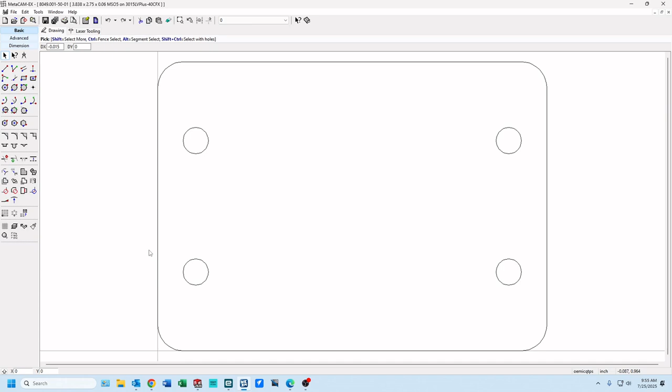And so we are still in the laser post-processor, so we need to change this. There's a quirk to this in that you go to part settings, defaults, load by name, and click on Trumpf, hit OK, load all settings.

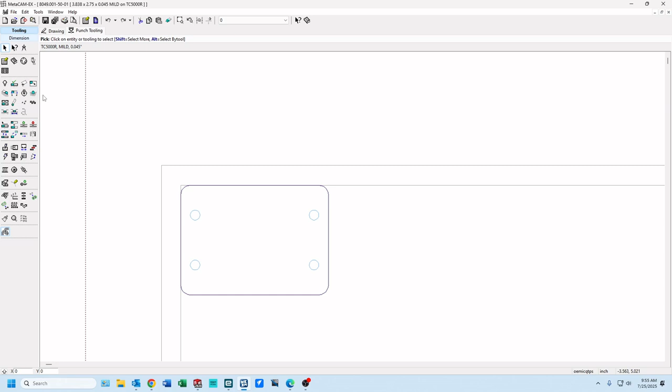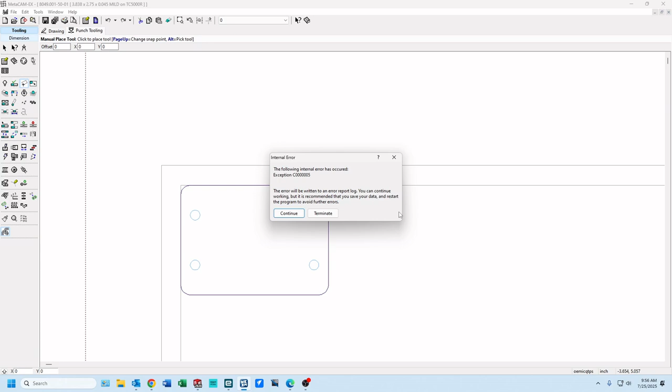When you go to tool this, it gives you an error and closes for whatever reason. As soon as I went to go select a tool, I think the reason is it still thinks this is laser, but then we have the Trumpf, so it's got conflicting data. So essentially it needs to reload. If you just hit terminate, it'll just close Metacam out.

So now when you open it, re-import that DXF file. We use the same one again, hit OK. Now it says punch tooling. You click on that, you can see the clamps of the Trumpf.

And now when we hit it, it'll actually bring up our tool library. Once you bring this in, you just need to close it out, reload it, and everything's good. It'll be fine.

So we don't need to do anything with this part. We'll do the wire joints in the tooling section of it. So we're good with this.

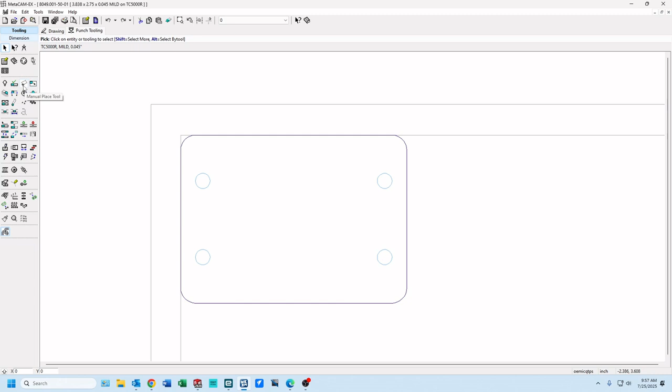So first thing you need to do, same thing, go here. You want the machine to be the TC5000R. Material's mild, thickness we'll do 060 again.

Sheet size, the Trumpf will do up to a standard without a sheet shift. It'll do a 5x10. It will actually do a longer sheet than 10 feet wide, or 10 feet long rather. We haven't done that, but it has the capability.

The Trumpf is different in the margins. Left, top, and right are all 1/2 inch, and then the bottom is 3.5 inch. The reason for that is there is a no punch zone 3.5 inches from the edge of the sheet, so the machine doesn't actually punch through one of the clamps.

So this should load up in the default, so you can just leave it. Everything else should be fine, you shouldn't have to change any of this. You can change the position of the clamps. For whatever reason, if you have a shorter sheet, a special size pre-cut sheet, you can actually go in here and change the position of the clamps. But otherwise, just hit done.

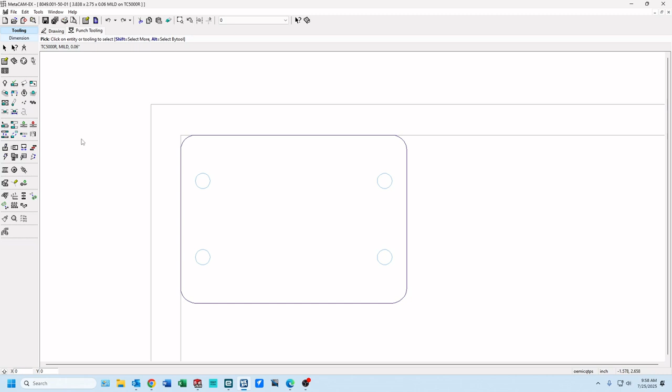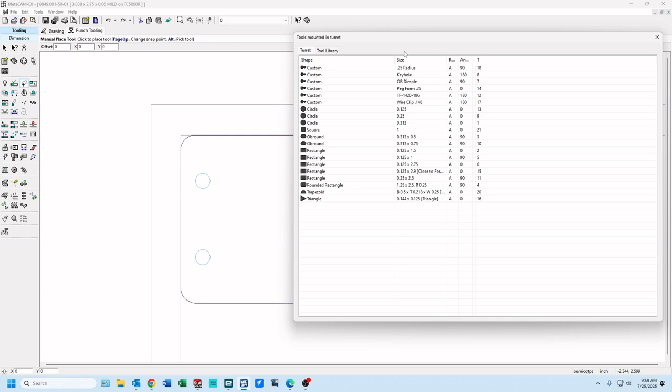And so now we are ready to tool this part. So manually place tool icon, it will bring up our tool library. This is what the software thinks is in our turret, these are the mostly used punches. If you click on the tool library tab, these are all the tools that we have entered in so far. So the first one we're going to do is the radius.

So 1/4 inch radius. This part has 1/4 inch radiuses on all 4 corners. So right now the tool won't do anything. If I place this tool, it's not going to turn, it's not going to do anything. So if I right click...

And now you can see I can pick a corner or a point of origin for this tool. So how do I want to do this? For this radius, I'm going to left click the midpoint of this radius section. And so now when I go to a radius on the part, it will actually automatically turn the tool, I don't have to do anything to it.

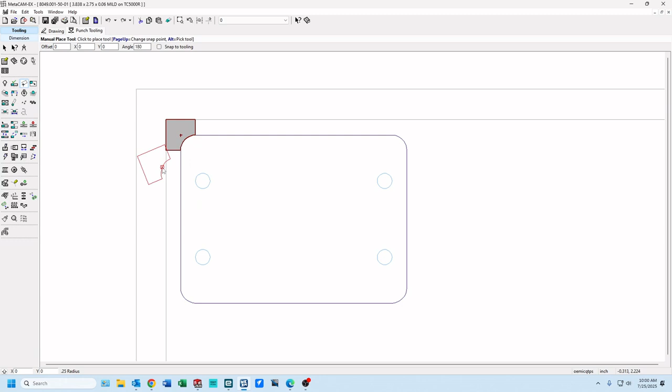So we start here, and you can see when it lines up to the midpoint, you can left click this and it will place the tool. So here, left place that, place that, place that. So now we have all of these in line.

So next step, let's do the circles. I think these are 1/4 inch circles. So again, in our turret, we have a 1/4 inch circle. We'll just select that, and we'll just go to the center point, center point, center point, center point. And now we have tooled up all the circles.

So now we need to do this outer edge. There's a couple different tools that you can use, but the first thing we need to do is create a wire joint—everything on the Trumpf has to have a wire joint. That's so while this sheet is actually moving around on the machine, these parts don't get cut out completely and go flying everywhere, get up under the head, and cause a bunch of problems.

So we'll manually place a tool, and on this one we use a trapezoid. We'll right click, and when we do this it shows the center point. You can go to the center point and it will just place it anywhere on this line. If you right click and actually get the center and the end, it will snap to the closest edge.

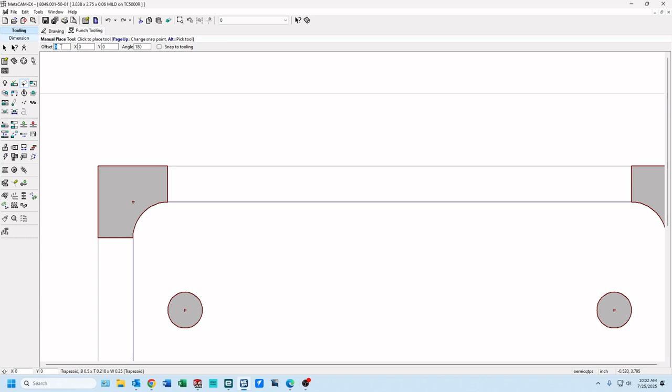Since this is 060, hit tab, hit tab, and it will come up to these boxes where you want to put in an offset. This will offset the tool away from that edge. I'm just going to put in 0.015 for 16 gauge and hit tab. Now it's hard to see, but when you scroll in, you can see it actually leaves a small gap between this tool, or this edge rather, this point, the start of this radius, and where the tool starts.

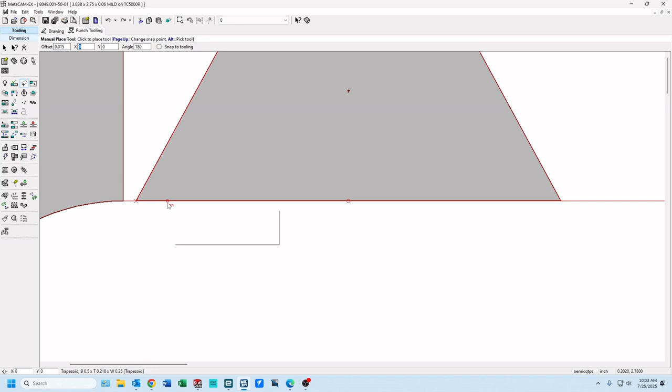So when we left click that, it will place that. If you visualize this sheet, this part is being left, it's not being cut—that's our wire joint. Doing it this way is a very strong joint since it has this angle to it.

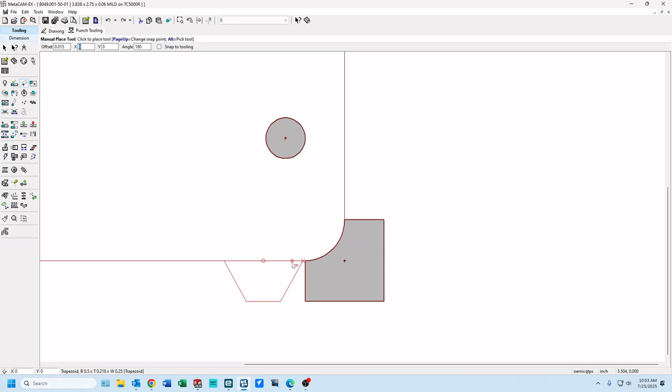So we'll do the same thing on this edge. Go here, snap to that, and then left click, and it'll again leave the same edge. So that will actually hold that part into the sheet.

Since this is such a small part, we probably only need to leave 2 wire joints. Larger parts obviously require larger joints. It's kind of a thing you just get a feel for. The operators will give you feedback if parts are hard to get out, or if parts are falling out—they may need more wire joints.

In this case, they probably wouldn't need more wire joints. If these are falling out, they'd probably just need a bigger, thicker joint. So in that case, you would delete these 2, come back in here, retool it with a 0.018, and retool it up. This should be fine—2 of these will be good, so we'll just leave it as is.

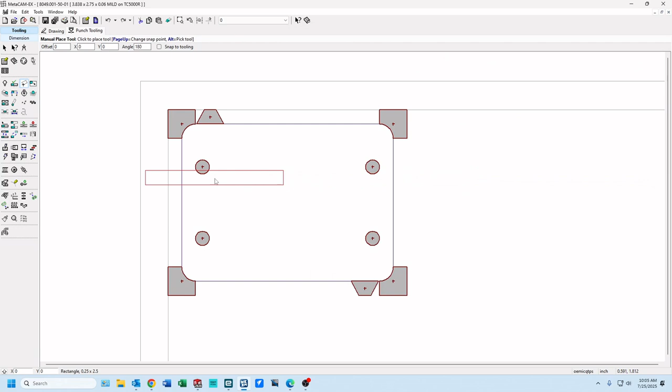So next, we're going to select the rectangle that we're going to cut this part out with. Since this custom size, this 1/4 inch radius, is 1/4 inch thick on this edge, I'm going to select a rectangle that's 1/4 inch wide. The longest one we have is 1/4 by 2.5. You always want to select the longest tool you have to reduce the amount of punches it takes to cut this part out. That's going to speed everything up—less wear and tear on the machine, less wear and tear on the tools.

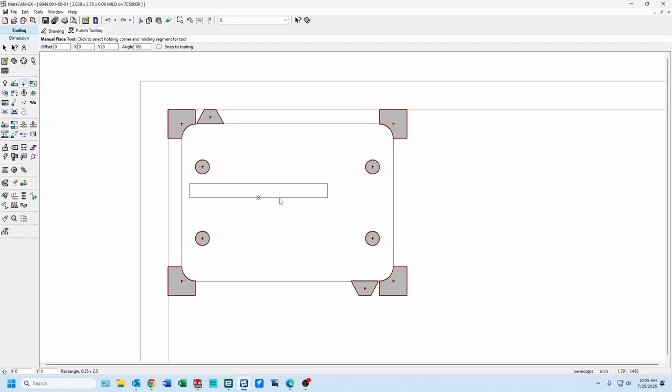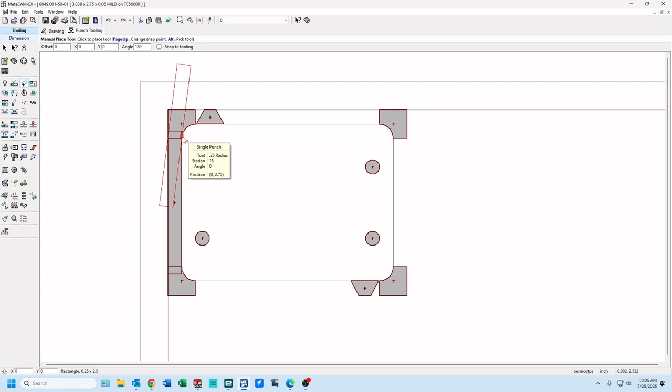Same thing—you right click it and you can snap to an edge or snap to a center point. So we're just going to snap to a center point, and when you look at this, it snaps to the center point of this line segment. When I left click this, it overlaps that 1/4 inch radius, which is perfectly fine because we're going to cut this out first, so this is going to be a void area. This little bit of overhang is not actually going to cut, so it can overlap tools—it's perfectly fine.

Again, this side, the right side, will snap to the center point of this line segment. Left click it, it's done.

So now we have a problem: this punch isn't long enough to punch this side out. So what do we do? There's an icon over here called a 2-point punch—click that. What MetaCAM does is once you have used a punch in this program, it highlights it blue.

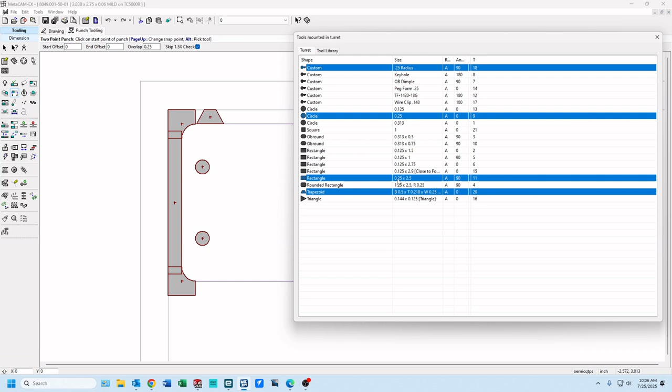So you will go back to this 1/4 by 2.5 rectangle and select it. When you right click, it selects an edge, and this is the edge that is going to nibble out essentially.

So on a rectangle, you're going to want to select the long edge. The reason for this is you select a start point, and then it kind of previews the tool. And then as you go along this line, it will select an endpoint, and you can see there's our tool, and then there's the rest of the path that it will cut out.

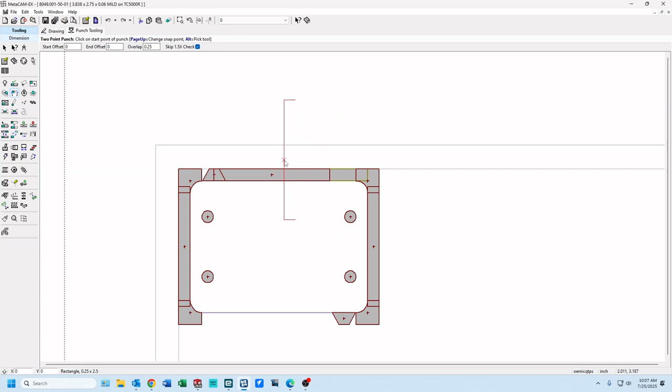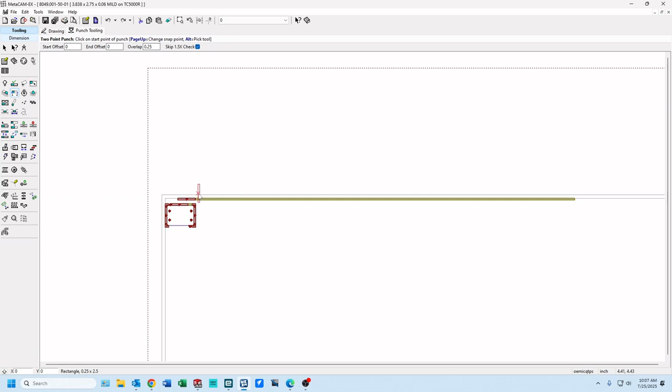So no matter how long this part is, we can just come through here and select the entire sheet. And so that allows us to not have to manually place all those punches. It will automatically figure out what it needs to do with the proper amount of overlap to cut that line out.

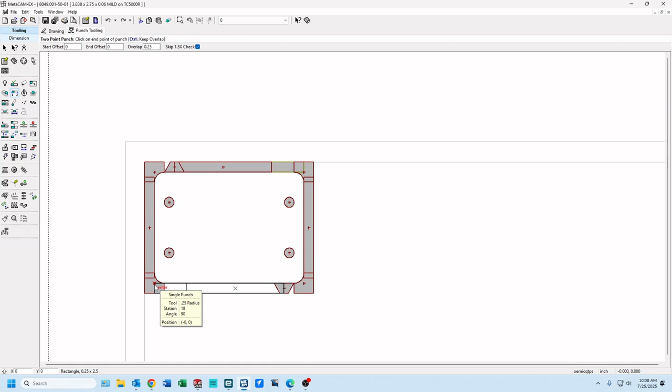So we'll do the same thing with the bottom here, just like that. I'm selecting the mid part of this trapezoid to start at, and I'm just going to do the center point of this radius tool. Again, overlaps usually are fine, and they're actually preferred, because if you go butt up right against the tool, sometimes it will leave just a little sharp nub. So when you overlap, it'll make sure that it doesn't do that. It produces a better part.

And so as you can see now, it will leave this void area, and it will leave all that around there. So this part shouldn't come out of this sheet. It should stay in there and run perfectly.

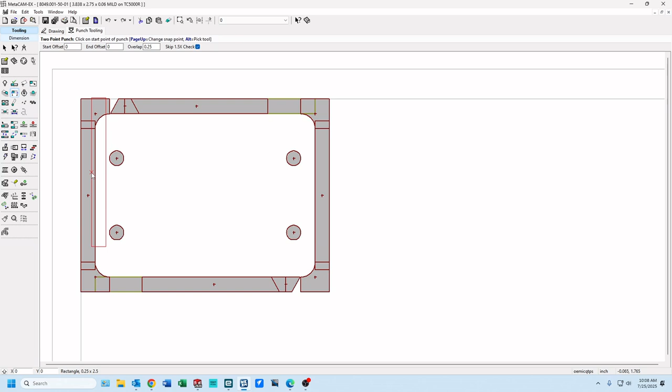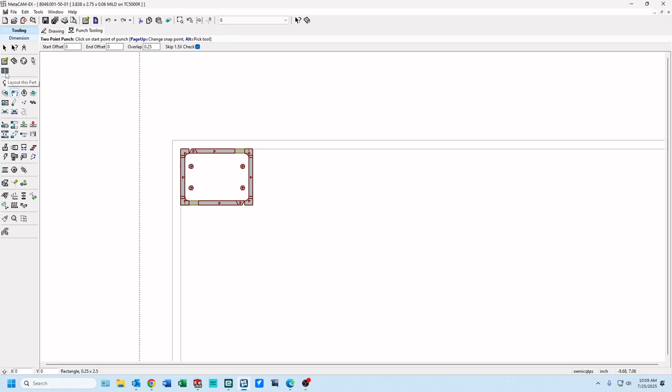So the Trumpf doesn't have the ability to create a pattern at the machine, so we have to do that here. We have to create a layout. So after you are happy with this part, you will go to layout this part, and it will ask you to save this.

I'll just back out. We don't have anything in the Trumpf folder. Let's see, wrong folder. So 8049 - we don't have a Trumpf folder, so we'll create one. We'll go into the Trumpf folder, and we'll save this part in the Trumpf folder.

So when it's saved, it will bring up this screen. Again, sheet size, these are where your clamps are, these are your margins. This one doesn't look bad. The usage looks fairly good. The yield's pretty good.

But you can play with these numbers. This is, I think, left, top, right, bottom. The bottom you can't change. The left, right, and top you can. You can go smaller, as long as it doesn't affect the integrity of the sheet. You can actually reduce that if you could get another row of parts. It doesn't look like we can, so I'm just going to leave it alone, but you could.

Spacing - so the machine will automatically figure out the spacing for these parts. So it takes all the tooling into consideration, and it is putting a tolerance of 0.2 inch between each part, left and right, top and bottom.

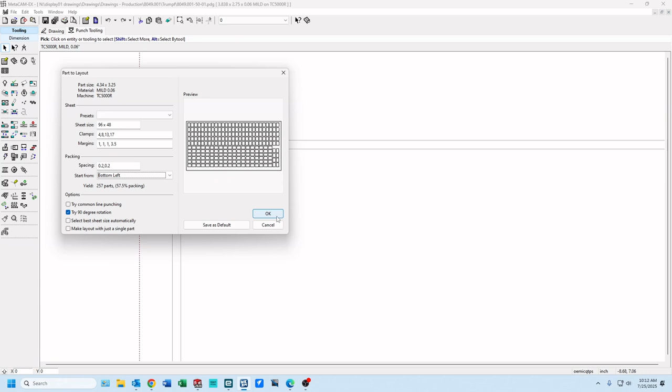So I'm going to go with this. We've got 257 parts on this sheet, so I'm just going to go ahead and hit OK. And so this is our layout. You can see the frame around it, the gap in between the parts. This is a pretty good layout.

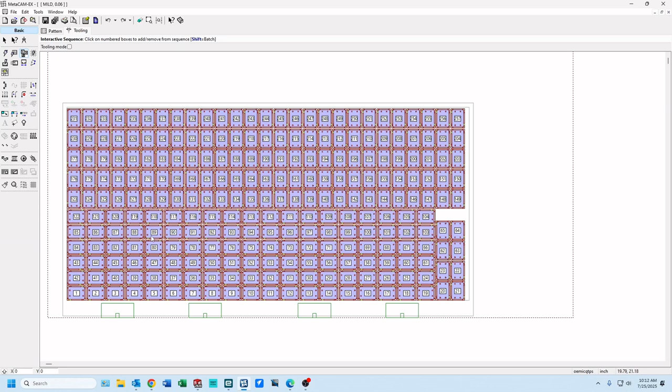So now you want to go to your tooling tab, and then you want to table sequence this. We're not going to individually - you can interact sequence, and you can pick the order in which you want these, but you don't want to do that, because what it'll do is it'll cut one part, so it'll punch the holes, then it'll switch tools, it'll punch the radius, switch tools, it'll punch the trapezoid, switch tool, punch the rectangle, switch tool, and then it'll go to the next one and do the same thing. It would be incredibly slow and just not good for the machine to do it that way.

So when you table sequence, you're sequencing by the punch. So like right now, if we left it this way, the machine would go out and grab the 1/4 inch punch, and it would punch every 1/4 inch hole in the whole sheet before it switched to the next one. So this is the way you want to do a layout on the Trumpf machine.

So we need to figure out which punch we want to punch out first. We know we always want to cut the part out last, and what that does is it gives you more sheet integrity, so that as the machine is moving the sheet around, it doesn't move around, it doesn't shift side to side and give you bad parts. So you always want to cut out the part last.

When we look at this, we're cutting out the part with this 1/4 by 2.5 rectangle. So what we can do is grab this rectangle. When we select, we can select individual angles of that punch, or if we select the name of that punch, it selects everything for that punch. So we want to select everything on this rectangle. We want to move that all the way down. You just left click it and drag and drop it to the bottom, and it will change it.

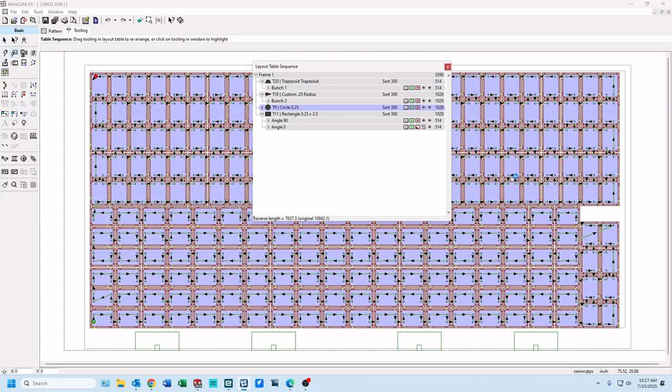And then we'll leave the circle where it's at, because if you had more slots or whatever it may be, you want to do those first. You want to do all the interior holes before you cut it out, so your cut lines are going to be last. So now we have it in the order that we would like it to be in. Now we need to tool it how we want it to run. So we'll go to the trapezoid first.

In general, it's easier on the sheet and the machine if it doesn't just jump back and forth like it's doing now. If you can have the machine just go in a straight line, punch, go to the next row, go in a straight line, it's much easier on the machine. The parts don't fall out. And so when you go here, you can actually select: do you want it to go up and down on the y-axis? Do you want it to go left and right on the x-axis?

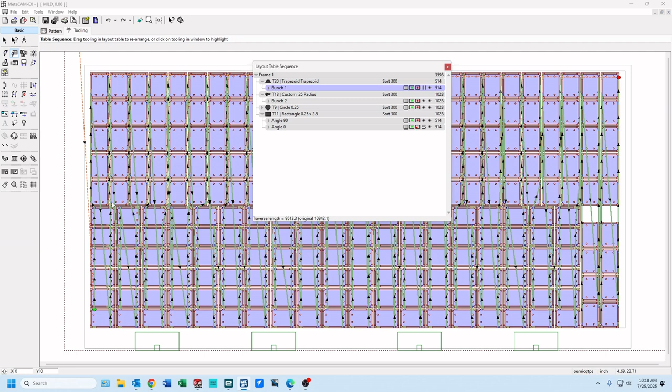So this one I'm going to do left to right. And for the Trumpf machine, it traverses much faster in the X direction than it does the Y. And so as long as it makes sense, you want to traverse the machine in the X direction as much as possible.

Another thing is you can determine the start corner and the exit corner of the toolpath. Normally, if you're looking at the machine, the tools are located down here by the clamps on the lower left side. So just for saving a few seconds, I always do my start point on the interior tools like that on the lower left side, and that way when it goes to grab this tool, it only has to traverse a few inches and then it comes out and starts punching instead of rapid traverse across the sheet.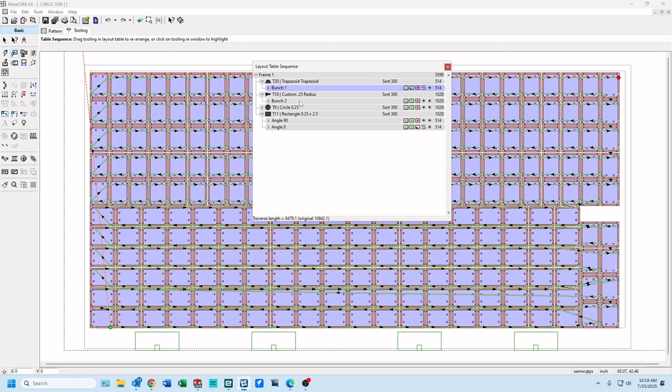Same thing with the next one, the radius. Click on it, again, we're going to do a left to right in the X direction, and we're going to start in that lower left corner. Same thing with the circle. Left to right, lower left corner.

And sometimes if you have a lot of holes that are closer in the Y than they are the X, then you might tool it up and down on the Y versus the X. And the reason for that is, even though the Y is traversing slower, if the holes are closer together, you're still saving time. So this is about time savings.

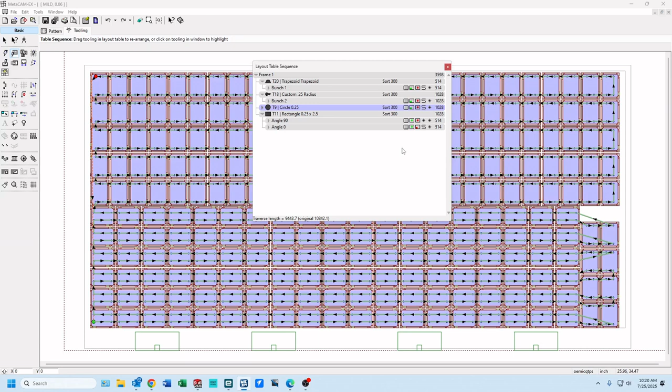And then lastly, we're going to do the rectangle. So whichever one of these you select, so this is 90 degrees, it's going up and down on the Y. This is 0, it's going left to right. Whichever one of these you want last, which will vary from part to part, you always want to end, so the exit corner you want in the lower right hand.

And the reason for that is, once it finishes this sheet and stops here, it will actually shift this way to the left for them to unload on the machine. So again, it's just time savings. You don't want to stop on this side and the machine just rapid traverses the sheet left, and you may get parts falling out, flying out. So you always want to end your last line, whatever it may be, on this lower right hand corner.

And so then we're going left to right with this tool, so it's just in a straight line going back and forth. When it's doing 90 degrees, we want to go up and down, so you can see the toolpath change. So we're going up and down on the Y-axis.

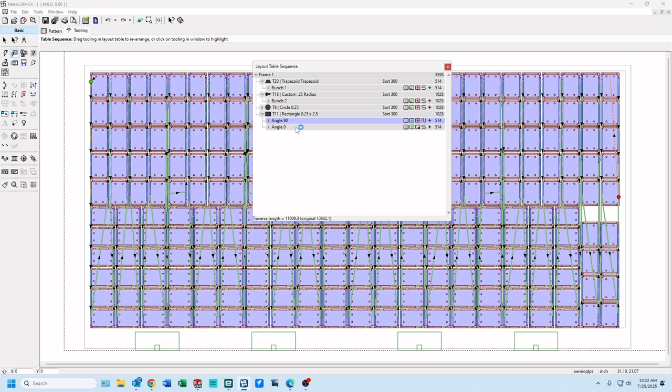And so where do we start and stop? So on this one, we want to stop here, close to the start of this one. So this one starts in this upper right hand corner. So I want this one to end in the upper right hand corner. So that way when it finishes here, it turns from 90 degrees to 0 degrees and starts punching again. And again, it's time savings. It saves a little bit of time.

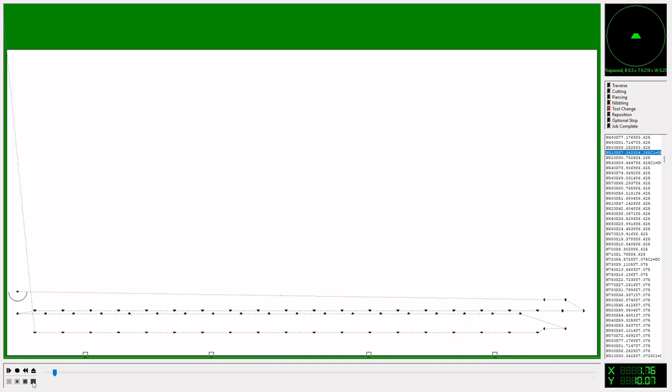So after we're done, this looks good, exit out of that, and we will simulate this program. And when you have a lot of punches, a lot of real small parts, it takes a minute for the simulation to come up. And we're going to hit play, and this speeds it up to the fastest speed, which is still not that fast. But you can actually watch the toolpath and how it's going to traverse the sheet, and you can look at the angle at which the machine is turning that tool while it's running.

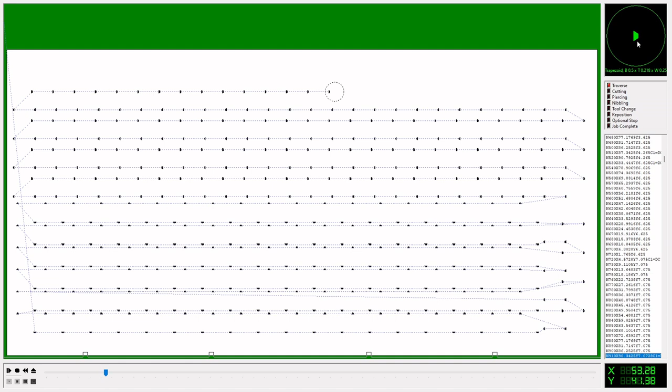So you can see it went back to that lower left hand corner of my screen and started this radius, and it started right there. And again, the reason for that is it's grabbing the tool in that corner, pulling it out, and it doesn't have to traverse the whole sheet before it starts punching again.

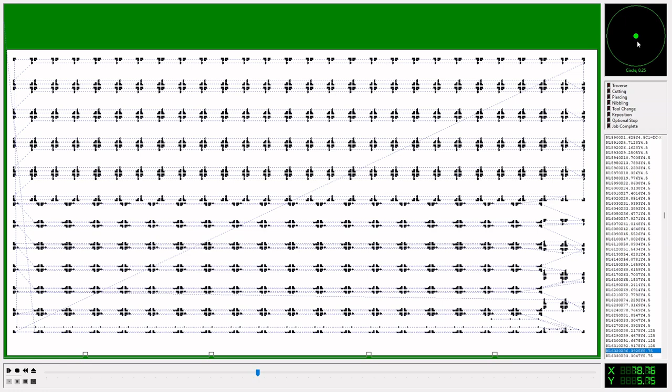It's going to grab the 1/4 inch circle, and you can see again it started in that lower left hand corner, and it's just going to go left to right on the x-axis while it's punching. And again, the reason why we go using the x-axis is just because the x-axis is about twice as fast traversing as the y-axis is, so it's much faster to do it this way.

And as you can see, now it's cutting the exterior of the part. Before this, the sheet had pretty good integrity. As it starts cutting these, it will start losing some of the integrity. So you have to be very careful about that.

This is where you'd want to make sure that when you're doing your last cut, you're moving from top towards the clamps. And the reason for that is as it cuts the parts out away from the clamps, that part of the sheet, once it's done with it, can actually move. It could shift a little bit as it loses integrity, and it won't affect the part because they're already cut out. And so, when you're cutting out parts and you're in your final step, you always want to move towards the clamps.

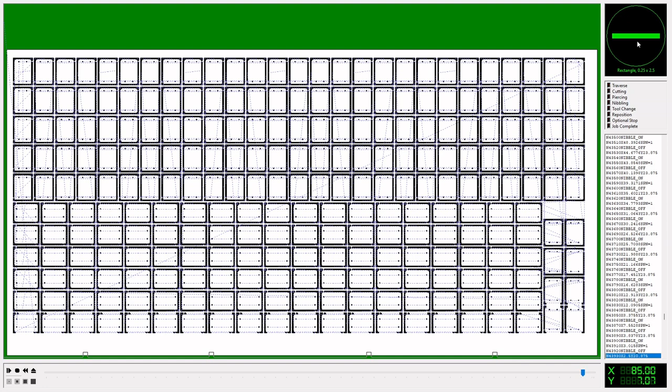So it's going to end in that lower right hand corner, just like we wanted to. Everything looked good with that, so we're going to eject and get out of this simulation. And I'm happy with this program, so I'm going to save it. Back in the Trumpf folder. You always want to create a folder so you can separate your programs. So if you have a MITS or a Trumpf or a HOMAG or whatever it may be, you want to separate them by a folder. Part number's right, so hit save.

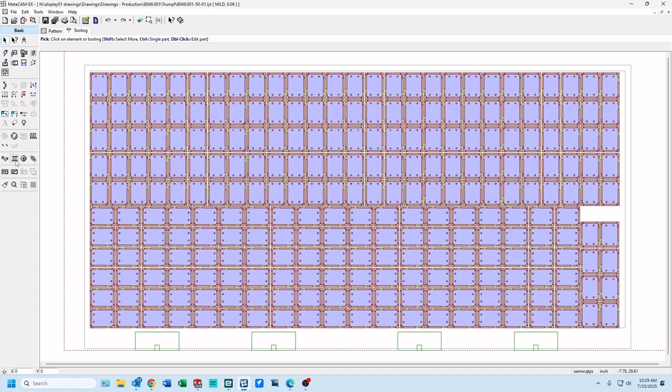Okay, now we want to generate the code. And it might take a second just because there's several punches. But what's going to happen is, when we go to this basic setting, there's two things that we may have to add. And you've got a nibble and a single. So what this is, it will actually have the machine dump out the slugs that it punches out.

There's a chamber that has vacuum in it on the Trumpf machine, and it's got negative pressure in there so that the slug actually sucks away from the die so it doesn't get caught up. What will happen if you punch out a bunch of material, that chamber fills up, and then it'll actually cause a bunch of problems. So what you want to do is every so often you want to dump that chamber. And so this is what this is.

So the difference between a nibble and a single. A single is just one single punch. So when we look at this, we're looking at the circles, the trapezoids, the corner radius. Those are all single punches. And usually those aren't a problem unless you have just a ton of big slots or something that's got a lot of material. Usually you can get away with not dumping them, but we may end up doing a dump on the singles.

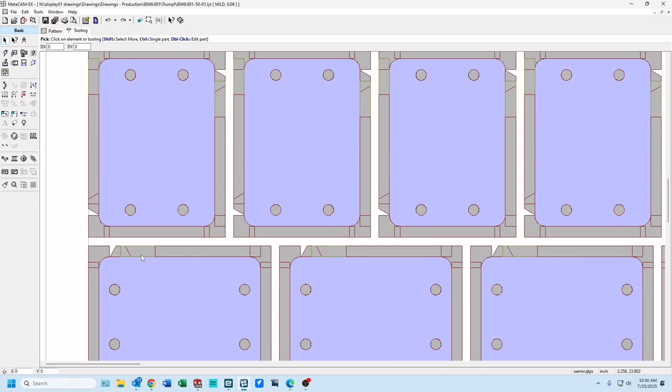The big one is the nibbles. And so as you can see, when we did that 2-point punch, that is referred to as a nibble because the machine is actually nibbling out that line. And so when we look at this part, the top is a nibble, the bottom is a nibble, the left and the right are punches because they're just single hits. It's just that one rectangle hitting by itself.

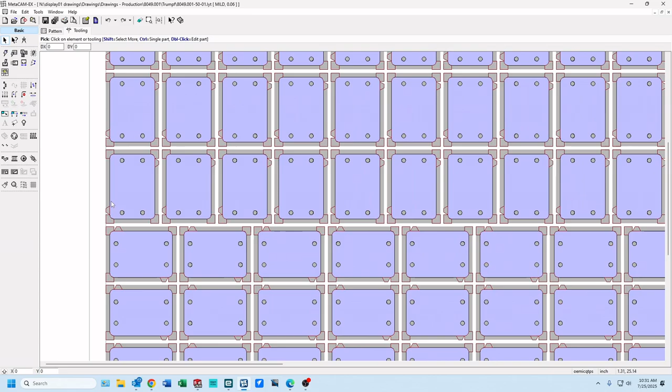So when we back up and we look at this layout completely, there's a bunch of nibbles and a bunch of those side left and right punches, and if we don't do a dump several times during the sheet, that chamber will fill up and cause problems and potentially could cause damage to the machine. So let's go back here. So what I'm going to do is, so you've got 1, 2, 3.

Get this out of the way. So you've essentially got 21 parts in a row, and each part has 2 nibbles and 2 rectangular punches. So we'll do the nibbles first. So we want to end up with about maybe a quarter of this sheet before we dump.

Maybe we'll do 2.5 rows. So if we have 21 parts, 2 nibbles per part, that's 42 nibbles per row. So if we look at 1 row, 2 rows, that's 84, and then half again, so that'd be 84 plus 21, which would be 105. So when we go to this basic setting tab, we'll tell it for nibbles, every 105 nibbles, we want to dump them. Okay?

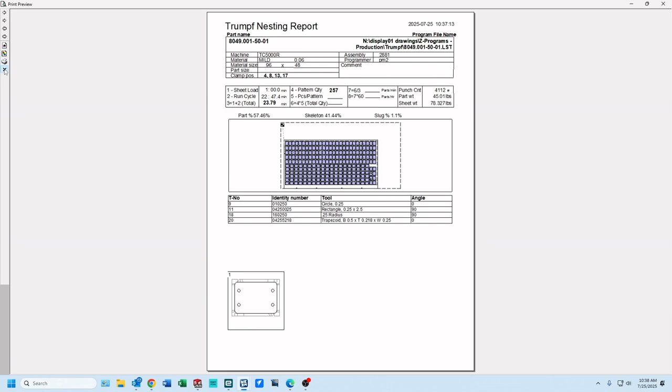If you're ready to print it, you can hit print over here, or you can just hit the print button, select the layout Trumpf report. It will then ask you which printer you want to print it to, you select which printer you want, and we are done. This is a completed Trumpf program.